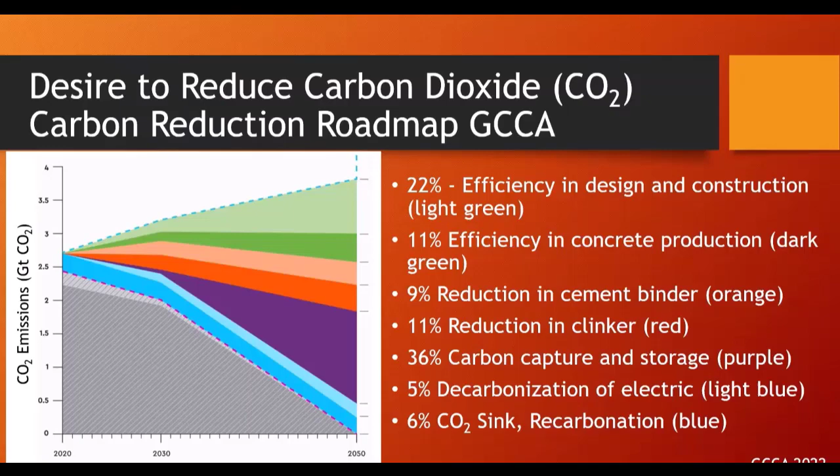And I want to just acknowledge Professor Burkan Isgor, who's done a lot of the work with us here, and I'd like to just start to jump into this. If we look at the Global Cement and Concrete Association roadmap, over 50% of what we're going to be doing to reduce CO2 is stuff we can do right now. So efficient design, efficient concrete production, reducing the binder, reducing the clinker, that's over 50% of what we can do doing normal standard concrete that's already scaled. We can do this efficiently, we can do this currently. We don't have to come up with magic dust to do this. This is something we can do today, right now, with existing codes and existing technologies if we put in a little bit of effort.

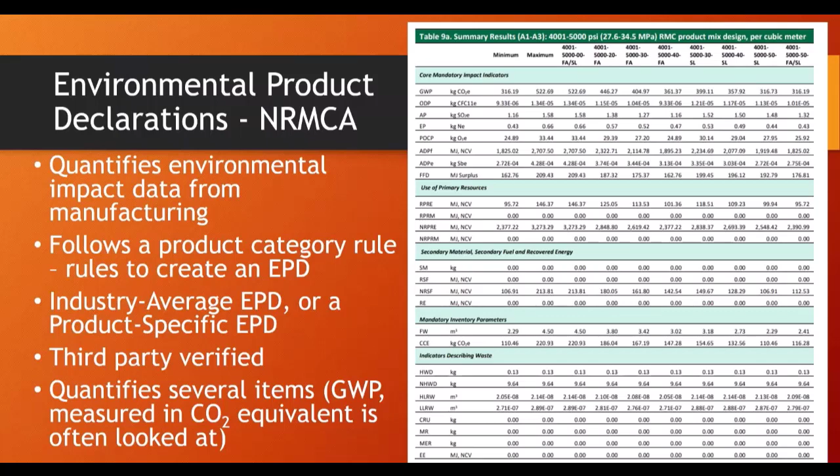But what we really want to start to try to do is quantify how we're making these mixtures more sustainable. And one way that this is done is through an environmental product declaration, the EPDs. And some of you will look at this and say, that's the NRMCA EPD system. One of the things that I want to point out is that NRMCA did work with Athena to establish LCA for a variety of mixtures. As this was going on, many of us said, please make sure we don't just focus on compressive strength. So what you notice is all of these categories are based on compressive strength. And the big thing I would just mention is compressive strength has been related to the GWP, but compressive strength is a measure that at its best is incomplete in this discussion.

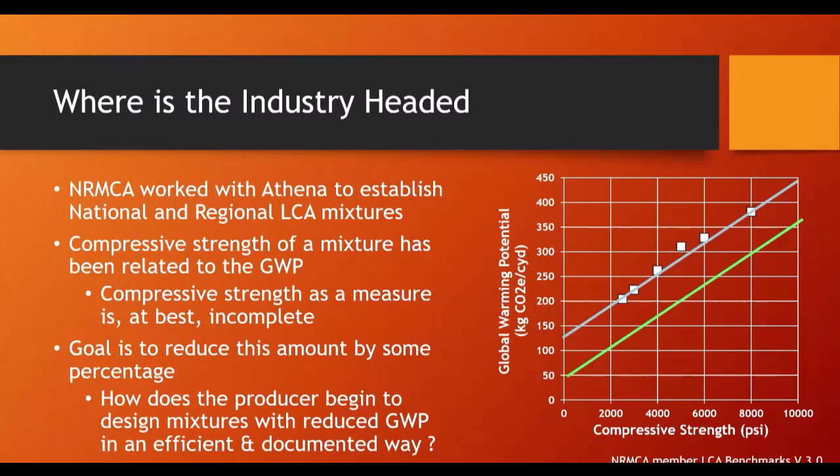And as Tom mentioned in his talk, and I think this is going to become a theme as we start talking about moving cheese, we can't just continue to focus on compressive strength. There are many other things that we need to do. The goal, and what you'll see in the 323 document that was being discussed earlier, is trying to take that global warming potential for different strength concretes and reduce it by a certain percentage, whether it's 15 or 20%. So the question is, what about this concrete mixture? Is it the best of times for this concrete mixture? Is it the worst of times? Is this a good mixture from a GWP perspective or not?

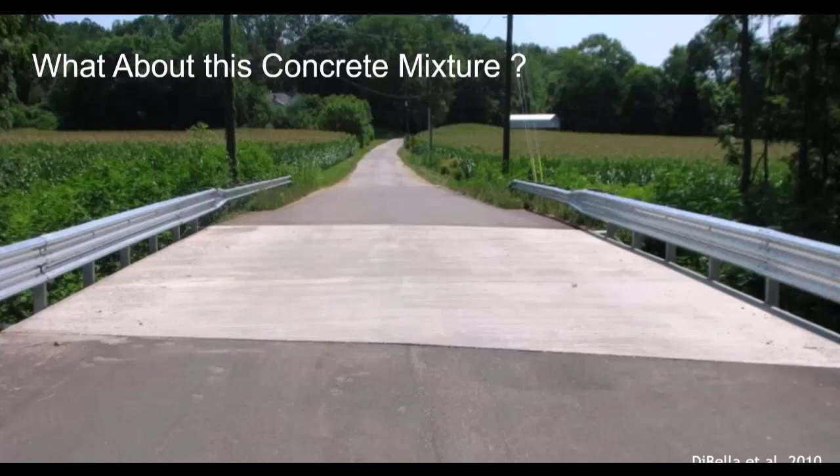And we could start to dig into this, and we could start to do some of these calculations. So this is a fairly standard DOT mix. It's an INDOT Class C. It's what a lot of the Midwestern states are using. It's fairly typical, not surprisingly because it's widely used. It falls very close to the NRMCA data. You can see the little purple circle over there. It's right on the line. What I would mention is this is more aggressive than the typical exposure. Because it's more aggressive than the typical exposure, compressive strength isn't capturing everything. But if you actually look at the GWP calculation there, what you'll notice is the total amount for the yard of concrete is 273 kilograms of equivalent CO2 per cubic yard, but 240 of that is coming from the cement.

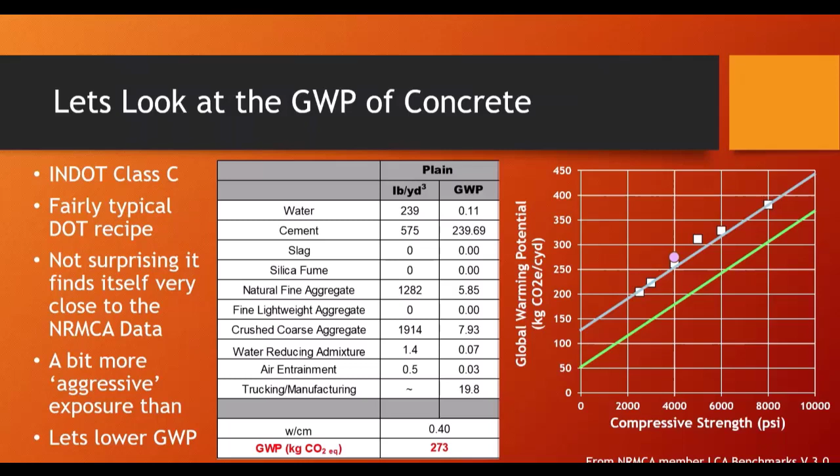So the first big thing, and you saw in Dean's slide a little earlier, lots of people focusing on the binder. The reason they're focusing on the binder is because it's 85 to 90% of the overall global warming potential. So the question comes out, could we do something to make this more efficient? And Tom talked about, his mix 2 was a slag replacement. Here we see a slag with a little bit of silica fume being added. This is a real concrete mixture.

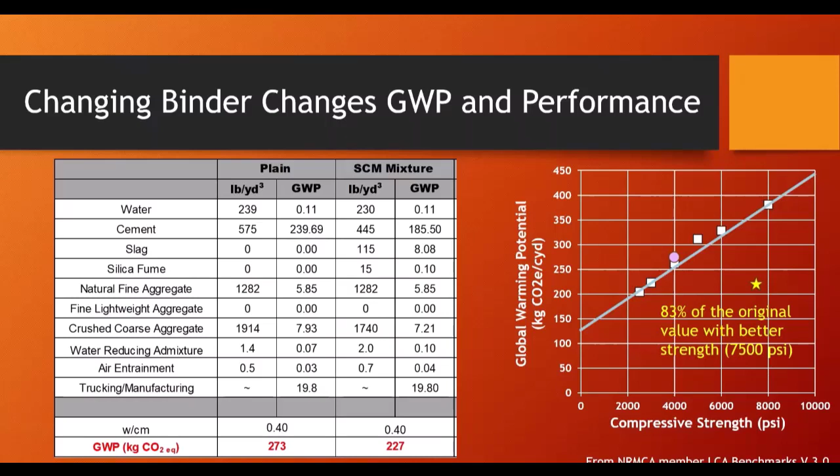All right, it was mixed and designed before people were super excited about global warming potential. But the big thing I would tell you is this dropped the global warming potential by about 17%, very similar to what Tom saw. But in doing that, we also got a very substantial increase in strength. We went from around 4,000 psi to around 7,500 psi. We're now at that little yellow star on that graph. So, a reduction in GWP, but we moved over.

So again, we could ask, is it the best of times or the worst of times? Dickens asked this question, where he had the tale of two cities. I'm going to talk about the tale of three concretes. So as we look at the tale of three concretes, we're going to look at that conventional mix, the mix where we had the slag replacement, and then I want to talk about a mix with internal curing.

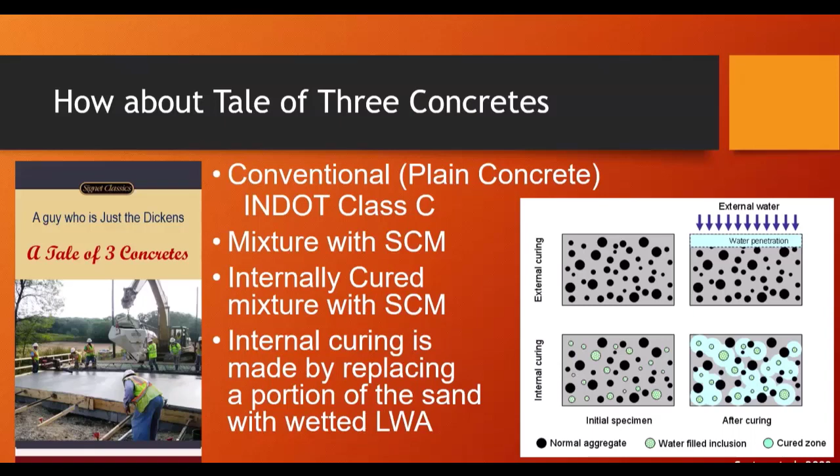Internal curing is just replacing a portion of the sand with lightweight sand that's porous. It provides curing water to the system that does exactly what we want in our concrete. It cures the cement to make a glue. That's the whole purpose of this. It helps to reduce cracking in those systems.

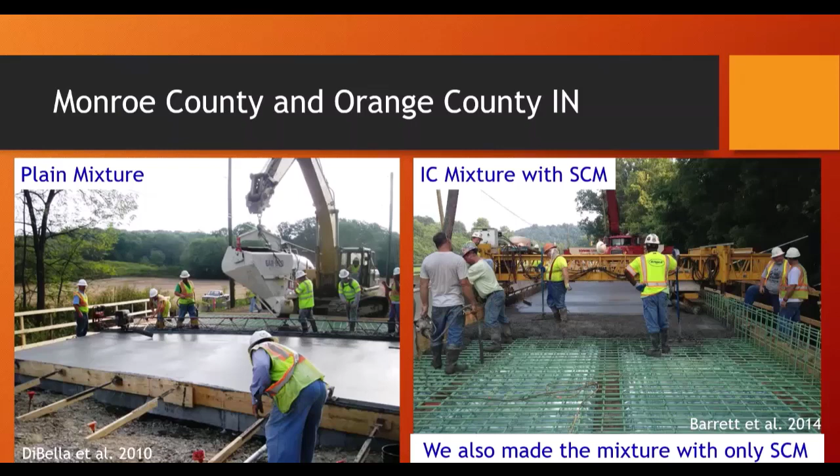Now, if we look at this, this is our conventional mixture that's going out there. The one with the SCM is over there, and as Tom showed, it's incredibly important that these can actually be placed. These are being placed in real life, and as they're being placed, we're actually taking a whole bunch of data, and we're looking at this.

Now, one of the interesting things when we start to look at the internally cured mixture, and we do our tally, we find out that we had our original mix, which was the Class C mix, which had a global warming potential of 273. We dropped the global warming potential by using slag in that mixture and replacing cement with that. But we see the global warming potential go back up when we replace sand with the manufactured lightweight aggregate sand in the system. So we're back up to that 277 value.

And if I asked you which one of these mixtures would you choose for your project, which one would most people in here want to choose? It's the class participation part. Yellow star. The yellow star. We're going to go to the yellow star because we're fixated on the global warming potential right now.

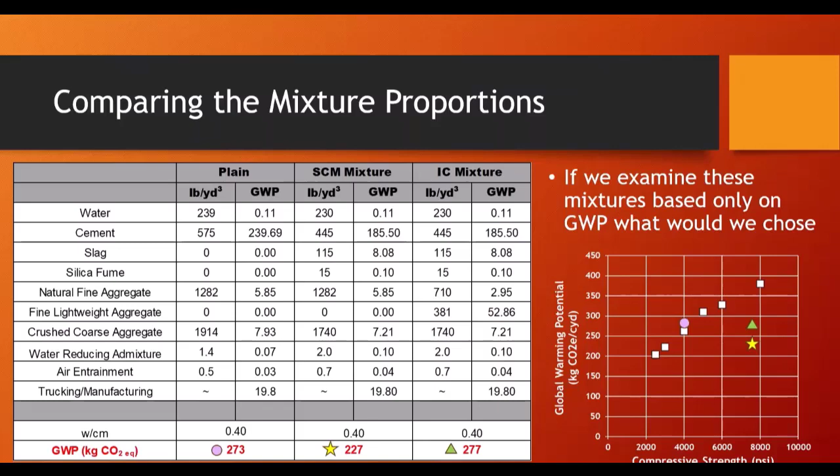As an industry, we can only focus on one or two things at a time. Historically, it's been compressive strength and dollars. Now we've thrown this global warming potential thing in, and we're fixated on that. And we would say that's the mixture that we want to go to.

But I really want to start to ask a couple of questions as we start to look at this. Is the performance actually important? When these were put in place, this is the conventional mixture. You can tell that it's got a very nice crack pointed out by that Sharpie pen. So if that gives you some size scale, it is a very nice crack. The one on the far side is that third mixture that we talked about that was crack-free. Which one of these do we want?

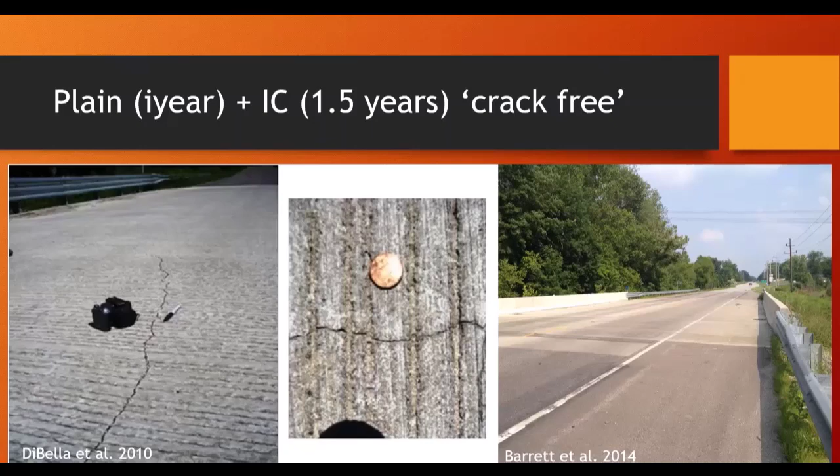Okay. Now, if we look at the time to corrosion of these mixtures, and we do some diffusion calculations, not assuming any of these mixtures have cracked, which we already saw the plain conventional mixture did crack, which provides a superhighway, we see that the first mix starts to corrode at about 20 years. The mix with the slag, we go out to about 35 years. The mix with internal curing and slag goes out to about 60 years before we start seeing corrosion.

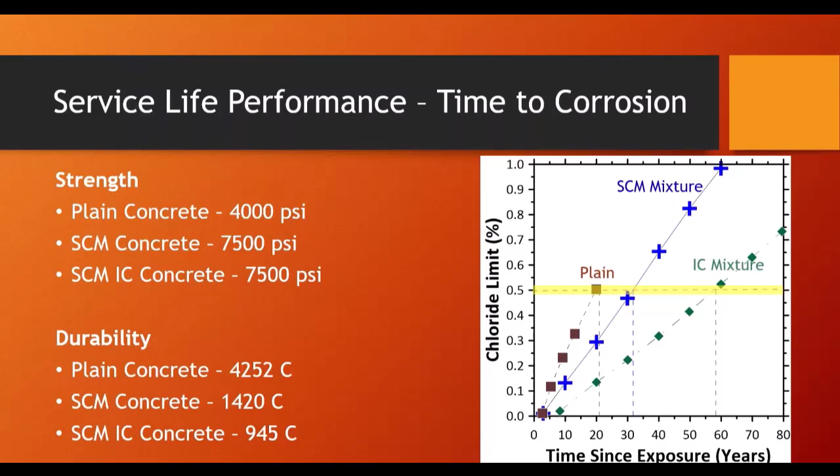So now all of a sudden, this starts to impact our thought process because we've changed the compressive strength by taking some cement out and putting some slag in. We've also changed the RCPT values here pretty substantially, and we've done more sophisticated service life modeling where we've shown those times to corrosion. And all of a sudden now, we can start looking at this global warming potential in different ways. And one of the arguments that I'm going to make is a challenge with the way we're looking at the GWP right now is we're entirely focused on A1 to A3, cradle to gate.

We are not considering the fact that the concrete is going to be out there to do something which we've designed it for. And if we start to figure in a 75-year period and we look at the equivalent kilograms of carbon dioxide, I didn't do all the service life modeling yet, but we look at these, and we see a very different evaluation of these mixtures.

If we take the global warming potential and divide by years, we see we're way down about 40% when we start to talk about that internally cured mixture. If we look at the bridge over this time period, INDOT would have replaced this bridge about 2.5 times over that period, where with the internal curing bridge, we use one bridge.

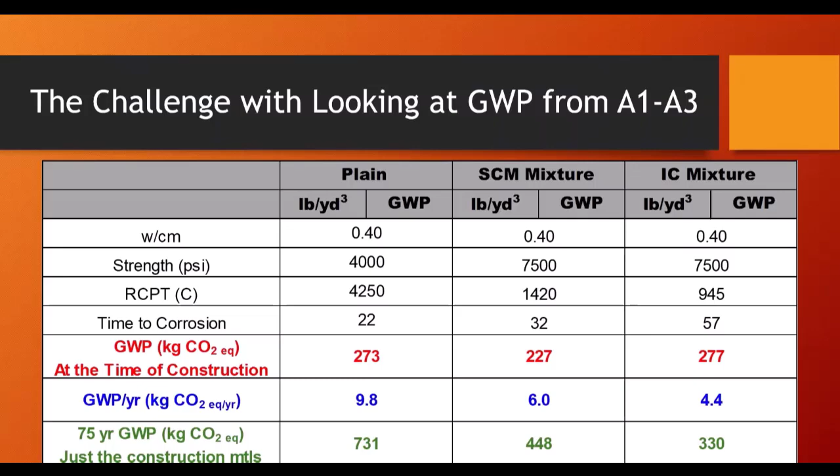Now we can have a whole discussion there, but you see, we've got about twice the amount of carbon in that over the life of the system, right? This is something we are not currently accounting for. And we've actually gone through and done some life cycle modeling with these. Now, I want to point out that this is a very interesting case because the bridges were built in Indiana.

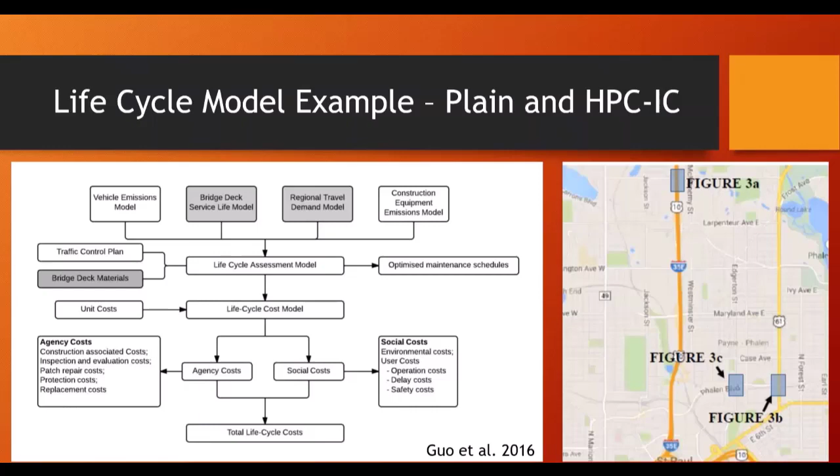The life cycle model is actually done assuming the bridges were placed in Minnesota, all right? Because the people who did the traffic modeling had a Minnesota model, and they said, we're going to drop this in there. But they did all of these calculations over the 75-year period and started to look at the differences in what the actual costs are, not just the carbon costs, but what the costs are to the DOT as they're doing these different replacements.

So again, if you take anything from this portion of the talk, what I really want us to do is actually start having a deeper discussion that says we have to go past A1 to A3 thinking. We have to think about the overall performance of the concrete, right? We have to design for a different performance, we have to simulate a different performance, and we have to start coming up with some way to do this a little bit better.

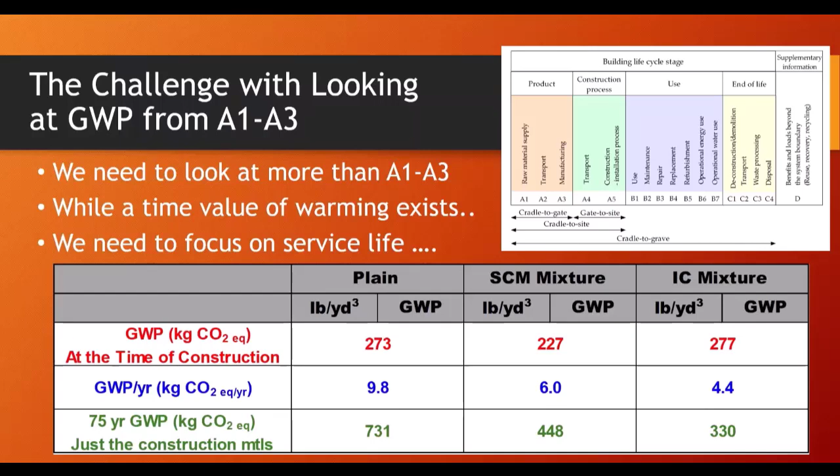Now, one thing I want to mention as we did this, when we just replaced some of the powder with the slag, you saw our strengths went up, we got a different service life. So one of the things that we're really trying to do now is saying, rather than just design for strength, let's design the concrete for what we really want in terms of performance, right? Our current design process, our mixture proportioning process, is not designed to give us the overall performance of every single thing that we want in the system.

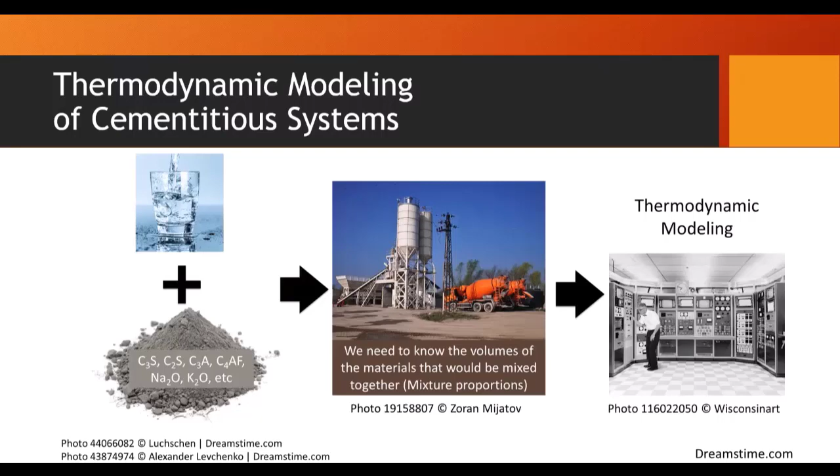We have an approach where we can do this using thermodynamic modeling, where we can take the chemistries of the materials that we're working with, we can actually simulate the performance, all right, and get the overall qualities of our concrete. So we start out with the chemistry of our cement. We can put fillers in, we can put SCMs in, and what we really need to be able to do is to quantify the reactivity of the pozzolans that we're talking about.

I want to be super clear when I say this. This is not a strength activity index. This is not just throwing something into a calorimeter and hoping for the best. All right, this is not doing some other crazy test that's been derived. It's a very simple test that we do to get a quantitative value of how much of that pozzolan actually reacts. We put that into a kinetic model, and we can actually predict the performance of those systems.

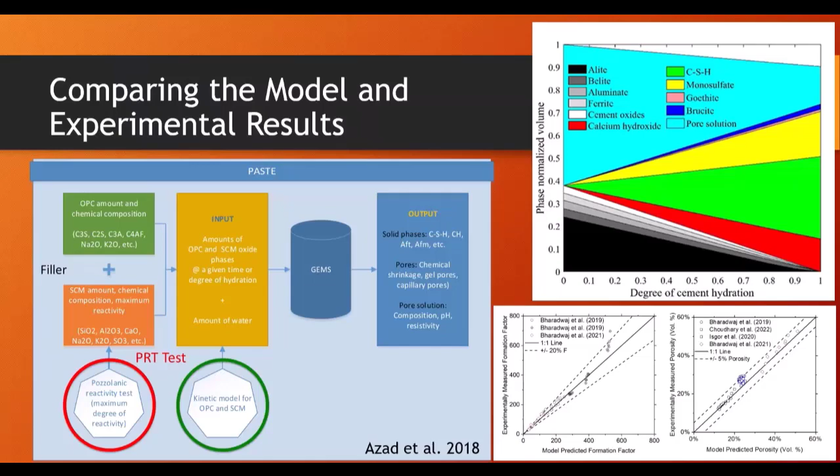Now, what we're saying is, the one thing I didn't mention here, and I should, every one of these properties has been validated against real measurements. So everything you're asking for, there's an AASHTO test that could actually measure that value, and we can stop and measure every single one of those as we go through the process.

Now, if we started to look at this, we could actually start to design our pavements and our bridge decks differently. Instead of just designing them using the standard 12-step process, all right, that 211 or other mixture proportioning procedures give us, we could actually say, tell us what you really want that structure to do in the field, and we can optimize the mixture for that particular scenario. So here's a pavement where we want a certain strength, we want a certain formation factor, which is like the resistivity that Tom mentioned, but it accounts for the pore solution.

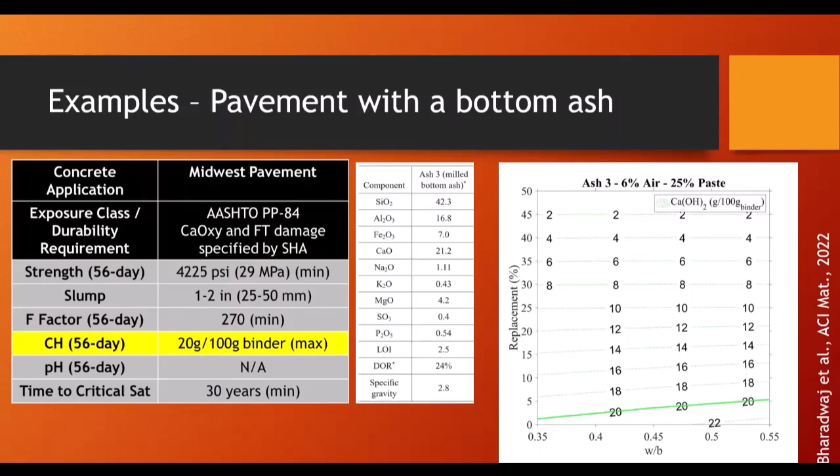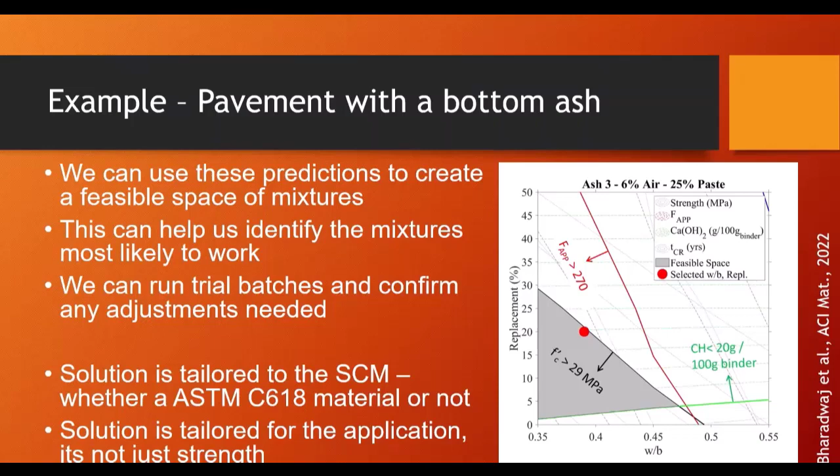All right? We can put all those graphs together. And if you overlap all those graphs together with the region of feasible mixtures, what you see is that gray blob starts to appear. That gray blob is all the mixture compositions that you could be using with a high potential for meeting your specified values. So all of a sudden now, we have a great spot to start looking for mixture solutions, right? We can all of a sudden start to say, this is the place where we would try to design our mixture. And we can go through and we can do things like the global warming potential, all right?

But what we've really been trying to do is we've really been trying to say, can we do this mixture design and bring 2 things into the overall discussion? The first one is really quantifying the SCMs that you're using, right? There's lots of SCMs right now. Historically, we've had fly ash, we've had slag. We could actually be talking about ground pozzolans, we could be talking about clays, we could be talking about all kinds of new materials. We have a simple test that tells us how reactive those materials are.

And I will tell you, much like my academic career, 100% is not always the best case scenario. Sometimes getting a B in the reactivity test is really what you want to be doing because you replace more of the clinker, right? If you're at 100% reactivity, you may only use 5 or 10% of the material. If you're at 50% reactivity, you're now replacing 30% of your clinker, which drops your GWP value substantially.

How do we get that reactivity? We get it through science. We know that a pozzolan has to react with calcium hydroxide to be efficient. So we say, how much of the pozzolan has reacted with calcium hydroxide in a pore solution? And in doing that, how much of the calcium hydroxide has been consumed and how much heat has been generated? And once we do that, we can compare that to a scientific equation that can be written that says, when this reaction occurs, this is how much heat is given off, and this is how much calcium hydroxide is consumed, and therefore this is the percentage of your material that is reacting.

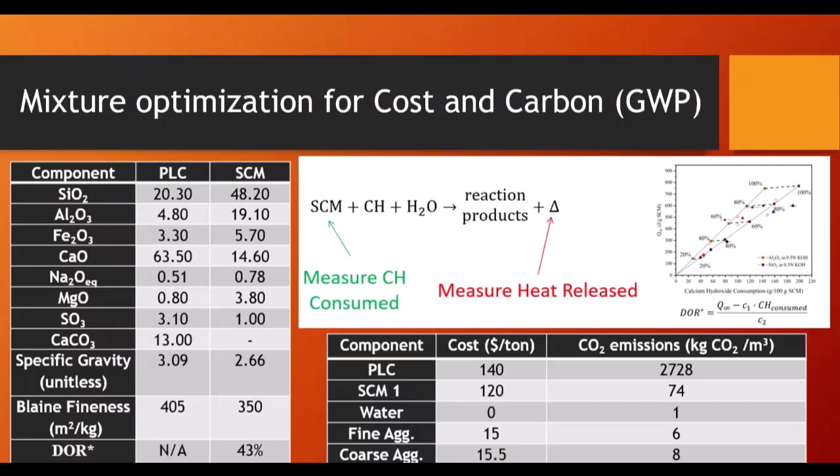Now, some of you will say, well, I could do this by getting the glassy phases and getting the crystalline phases and doing some advanced analysis. Yes, you can, and it matches up exactly with this test number that we get doing a very simple lab test, right? And now it's not, is it reactive, is it not reactive? We don't have to go to Dick Clark and American Bandstand and get some arbitrary number. We have a percentage that's calculated based on the portion of the material that's reacting.

The final thing that we're doing here is we're actually mathematically optimizing these systems. So a very simple add-on at the end of this program, all right, that we're doing is we're saying, let's take that feasible region that we had before, SCM replacement versus water to cement ratio. The one little trick I did between slide 25 and now is I switched this over to volumetric water to cement ratio because here's a little secret. Not all SCMs have the same specific gravity as cement, right?

Shocking, yes. All right. Well, it's evaded our industry for the last 70 years, right? Because we've just been doing mass replacement. We should be doing volume replacements because we need the same volume of paste in our systems. But when we do this, we can actually mathematically optimize these systems.

We can say there's a cost of the materials, there's an availability of the materials, and there's a cost of carbon. And we write a single equation and we say, let's come up with the cost of all those values. This blue shading gives us an indicator of the cost or the cost of the carbon, and all of a sudden we can start choosing mixtures that are optimal for what we have available. If our SCM is free, maximize the SCM. All right? If our SCMs are more expensive than the cement, we come up with different solutions, but all of a sudden now we can figure out how to use our mixtures the most efficiently.

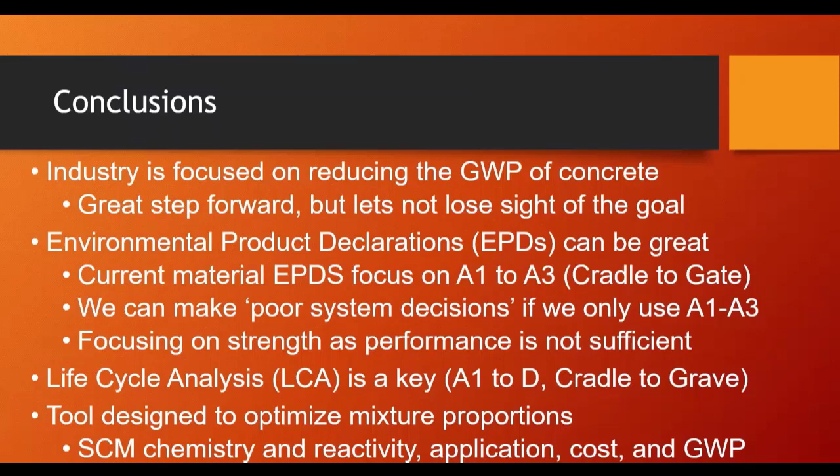Jason, very nice talk. And I'm glad you're finally starting to get it out to the notice that we should be looking at the total life of the structure, because certainly if I have a bridge that lasts 100 years versus one that lasts 50 years, I'm using half the carbon footprint no matter what I put in that bridge. Right. And I'm glad you also pointed out all those indirect costs of people sitting in traffic, and there are also CO2, and also has a dollar cost to this. I think that's almost as important as the science part of what we do.

Yeah, and I think, when we start having these discussions, so thank you, Neil. So, Neil's basically coming back and saying a lot of these things are really important. When we look at, for example, these costs, it's amazing when we consider the cost of these bridges from a DOT perspective, right? What I want to point out is this little blue bar down here is the actual cost of building the bridge. This red bar is the inspections, and the green bar is the cost associated with patching. When we look at purple, I don't know what that other color is.

I probably should be better at other blue is what I'm going to call it, because I have a very limited, I only had 8 crayons as a kid. I didn't have the 64 set, right? So other blue and orange, those are DOT costs, right? Safety, operations, travel time, right? When we start looking at those, they dwarf the thing that we obsess about, right? They dwarf that number. So I think one of the other things we need to start conveying as an industry is there are a lot of other costs that go into this system, and it's not simply the lowest cost when you buy something. Derek.

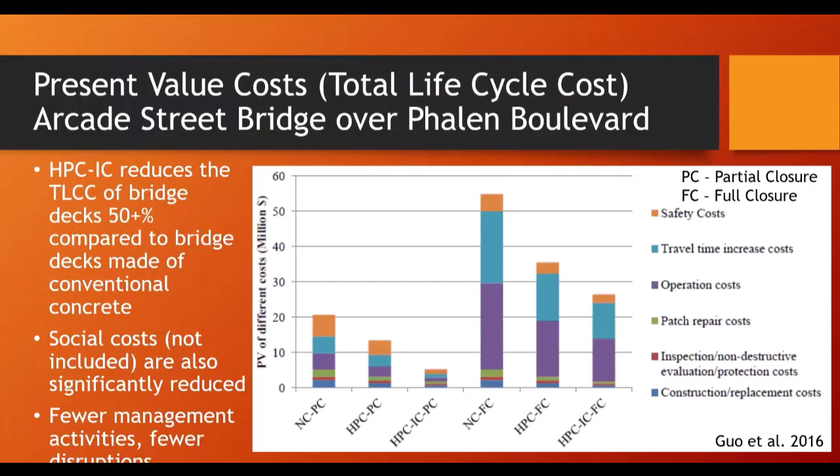Jason, thank you for imagining a much bigger picture. We're seeing in Europe a carbon tax directly on tons of cement, which is another cost. Can you tell us how you'd imagine incorporating that into the model?

Yeah, so this is actually where we bring this into the model. We bring carbon into our optimization as a dollar amount, right? So if you said this is the dollars per carbon, right? A few years ago, Obama said it was $47 per ton of carbon, right?

We bring that directly into this system, right? That's exactly how we bring it in. If it was a tax, we bring that in. If it's an imagined cost, we bring that in. And the challenge there, and the reason we went through this kind of exercise in optimizing, we had one presidential regime that said it was $3 a ton for carbon. We've had other ones who said it's $200 a ton for carbon. And we can now play those what-if scenarios mathematically with this approach to see where we need to start to end up. And just see where does it start to make sense, right?

I need to use a microphone for it. I lost my voice at Christmas time.

Excellent talk. I just want to make a comment. We heard in the first lecture, Dean's lecture, that we have already reached 1.5 degrees heating. So I think it is very urgent to make the concrete as sustainable as possible. And maybe it is more important to look at A1 to A3 despite of that.